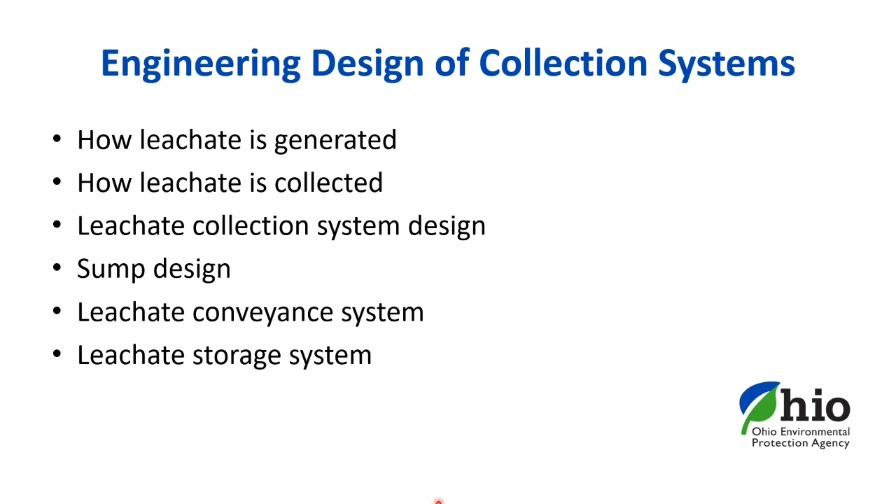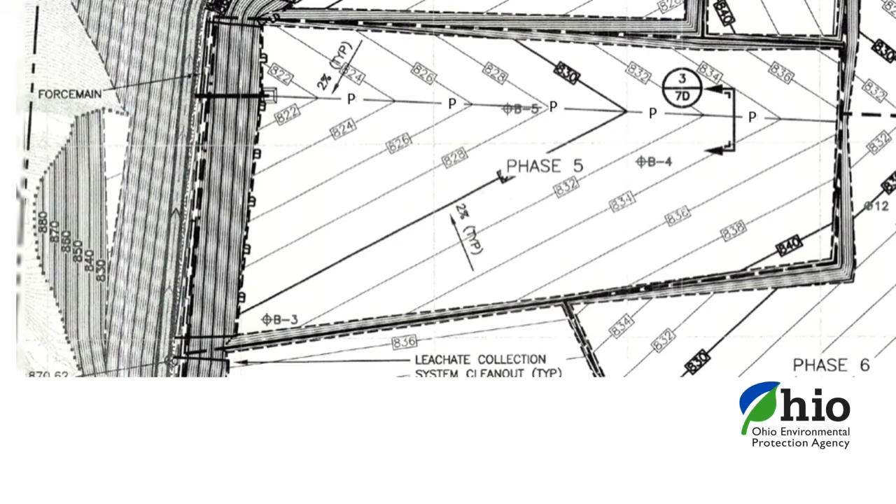If we look at this facility in cross section at the point in time where there's 10 feet of waste in the cell, we can examine one of the key design components to the leachate collection system, called head-on liner. If you think about head-on liner, it's basically the height that leachate fills up the landfill in comparison to the height of the drainage layer and the height of the waste.

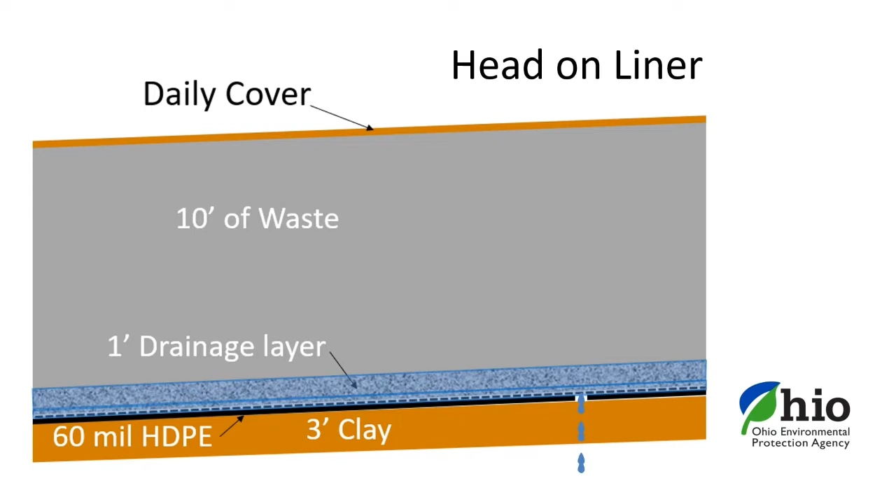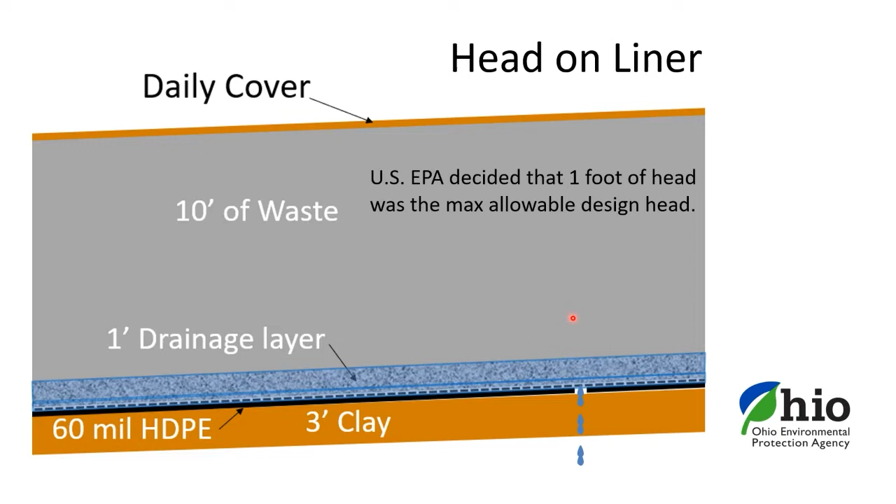In this example here, you can see there's a small hole in the HDPE liner, and there's a small amount of head on top of the liner system, and that hole would be leaking very slowly, much less than a gallon a minute. If there was an increased amount of head, more leachate would be leaking through that hole. As you can imagine, the higher the head gets, the higher the pressure gets, and the more leachate can flow through that hole. So in design, US EPA has limited the allowable head in a landfill to be 1 foot. That's one of the key things designers focus on when designing the facility.

The way they determine whether or not the facility maintains that less than a foot of head requirement is they use a computer program, the HELP model. It was developed by the Army Corps of Engineers for US EPA back in the early 90s, and it's been rewritten a few times since then. It's a fairly simple program, but it gets the job done.

When you're using that program, the main inputs you put in are the maximum flow length that the leachate flows, the landfill cross section you're designing under, and the permeability and slope of the drainage layer. Those are the key things you look at using the HELP model in designing the landfill's leachate collection system.

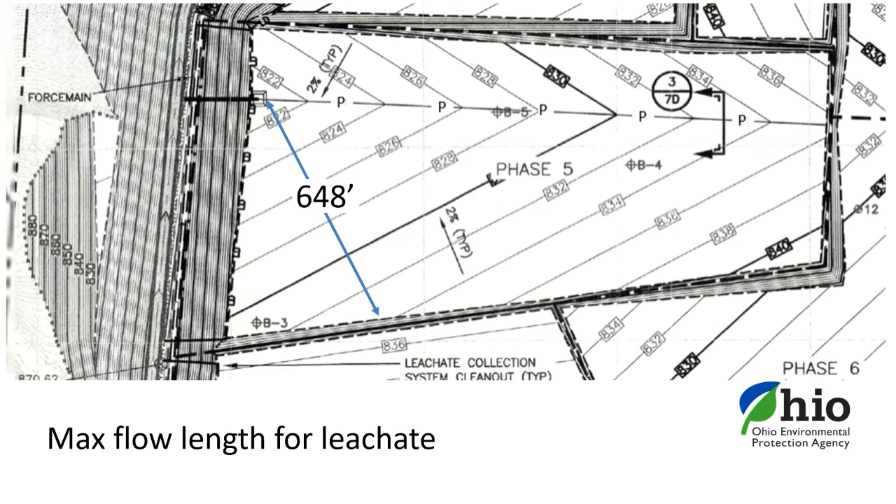So looking at this specific facility, the design scenario that Ohio EPA recommends when designers are trying to figure out what permeability to set their drainage layer at is a daily cover being placed in cross section, 10 feet of waste, and then the drainage layer and the liner components.

So in the situation where the designer is trying to determine whether sand is appropriate for that drainage layer, they'd feed all this information into the HELP model, and the HELP model would generate the calculated head on the liner system. With sand at 10 to the negative second centimeter per second permeability, which basically means a drop of leachate would flow at a velocity of 0.01 centimeters per second through that sand - fairly slow, but substantially faster than it would flow through the clay liner, which would be more like 10 to the negative seventh permeability.

If we did this calculation, the HELP model would tell us that it would end up with 12 feet of head on top of the liner system, which does not meet the design requirement, indicating to the designer that sand is not an appropriate drainage layer at this facility.

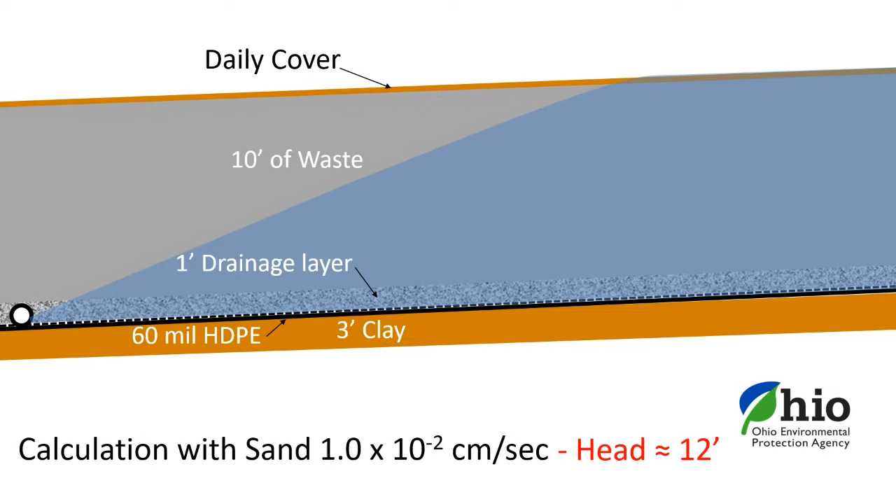If they did basically the same calculation but changed the permeability of the drainage layer to something more similar to gravel, with 1 centimeter per second permeability or greater, they would find the predicted head on the liner system would be about 11 inches, which would be acceptable design because it meets the 12 inches of head requirement. And that's exactly what this facility has in their design - a minimum permeability for their gravel drainage layer of 1 centimeter per second.

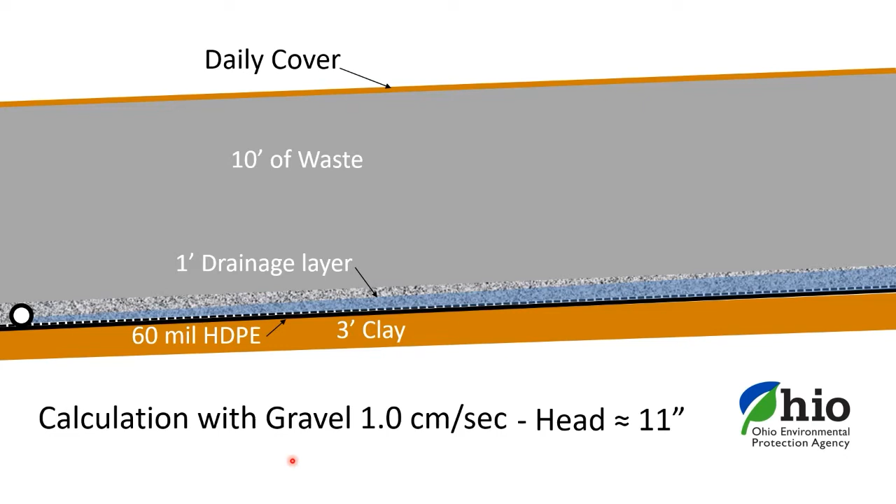So how do we get leachate out of a landfill? There are basically two different methods, and the landfill in my example actually has both. You can drain leachate by gravity out through the liner system to a lift station, then to a tank, and then it can either go to a sewer or be hauled by truck to a treatment plant. The other option is to pump the leachate out of the facility.

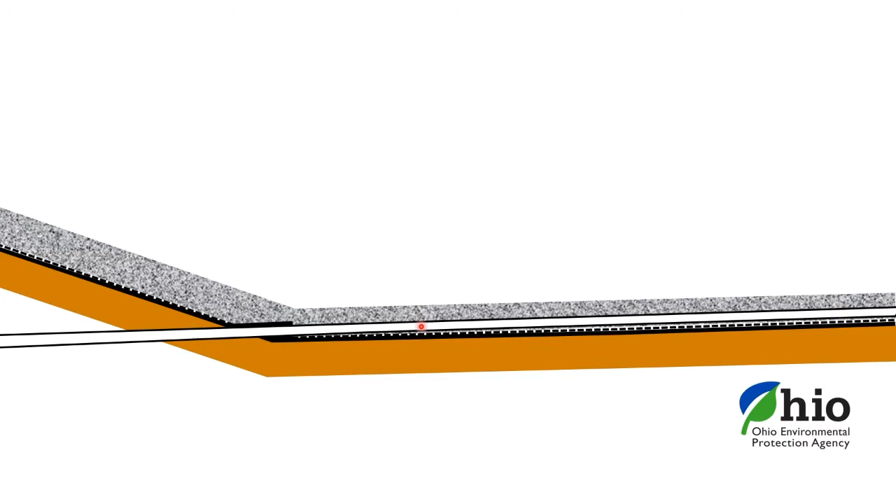If we look at a cross section where leachate is leaving the facility via gravity, this image represents the liner system and drainage layer of the landfill. Your waste would go in this area. We have the leachate collection pipe sloping down and penetrating the side of the landfill, going out to the lift station and eventually to the tank. At this penetration, there's a boot that keeps the leachate from leaking out of the facility.

From the lift station, leachate gets pumped up through a pipe and into the leachate collection tank. How these systems work is: leachate flows into the system, goes up, hits the middle pump-on float, and that turns on the pump, and the leachate is pumped out into the tank.

If this system isn't working correctly and the pump is broke, leachate flows in from the landfill, floats the upper high level alarm, and sets off the alarm, indicating to the operator that they need to come out and fix the pump in the lift station.

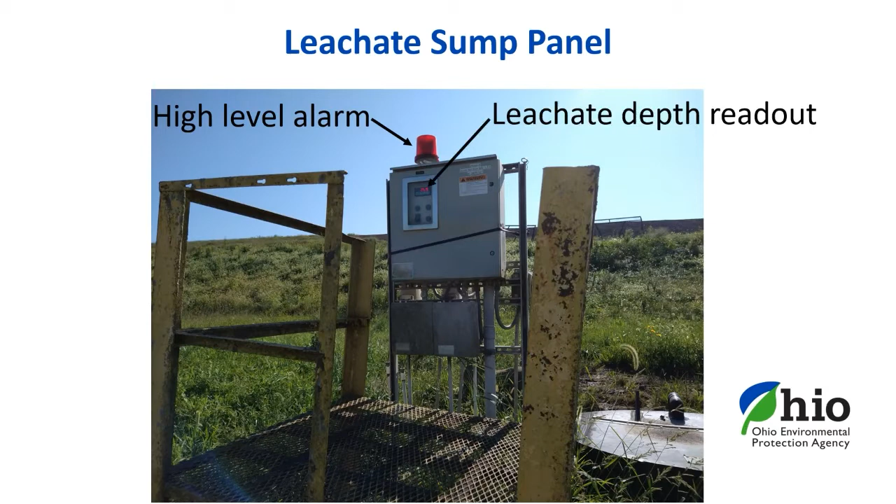If we follow the plumbing and wiring up the riser pipe, we end up at the lift station, the leachate sump panel. Here in the background, we can see where the riser pipe comes in and is plumbed in. On this leachate sump panel, we can see the high level alarm and the leachate depth readout.

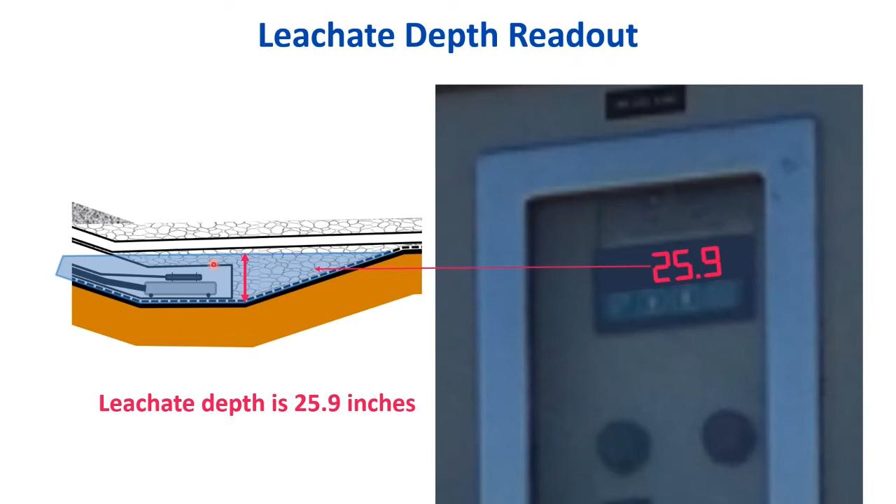If we zoom in a bit, we can see the current depth in the sump is about 26 inches. That means in the sump itself there is about 26 inches of leachate. And at this facility, the pump is just about ready to turn on and pump leachate out.

If we look back to our cross section, the basic way the system works is: leachate flows into the sump, gradually fills the sump, and eventually the pump turns on and pumps the leachate out. This happens multiple times a day, every day, and the system works just fine.

And obviously, on occasion, the pumps do break down, and when that happens, the leachate begins to build up on top of the sump, and eventually the high level alarm would go off on the sump. Our regulations state that the high level alarm needs to go off no more than one foot above the top of the sump. Often operators have it set at a lower elevation so they can come in and fix the pump sooner. The top of the sump is considered basically this grade break right here.

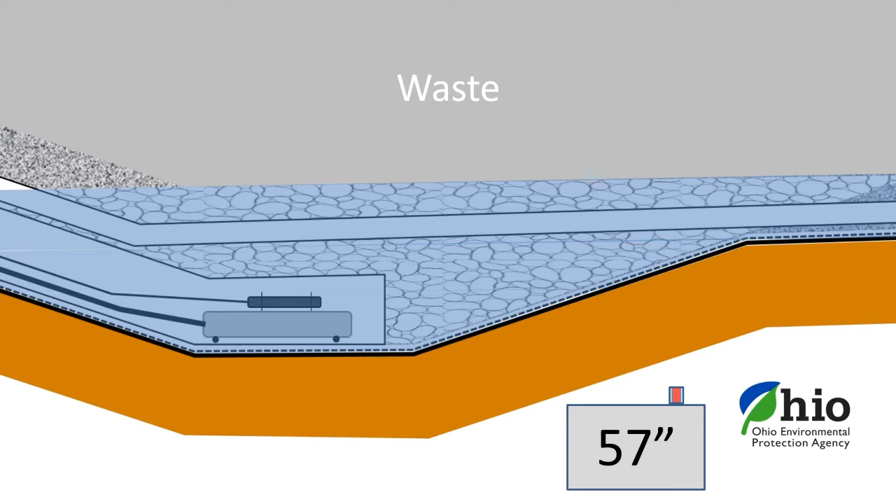So this would be your normal landfill cell, this would be the sump, and then this would be the top of the sump itself. Now looking at the leachate conveyance system: we go from the pump to the riser, out from the riser to the force main, and then all the way down to the leachate collection tanks.

Another common tank design is a double-walled tank, both above ground and underground double-walled tank. Both of these tanks are a tank within a tank. So there's a tank that holds leachate, and then there's a tank that holds an air gap and the inside tank.

So the way they're supposed to work is there's always air between the two tanks, and there's a witness zone where you can either look through it or there's a pressure transducer inside that space between the two tanks, so we can find out if there's leachate between the two tanks, which there's never supposed to be. It's always supposed to be dry. But if there's a hole in the inside tank, we'd find leachate between the two tanks.

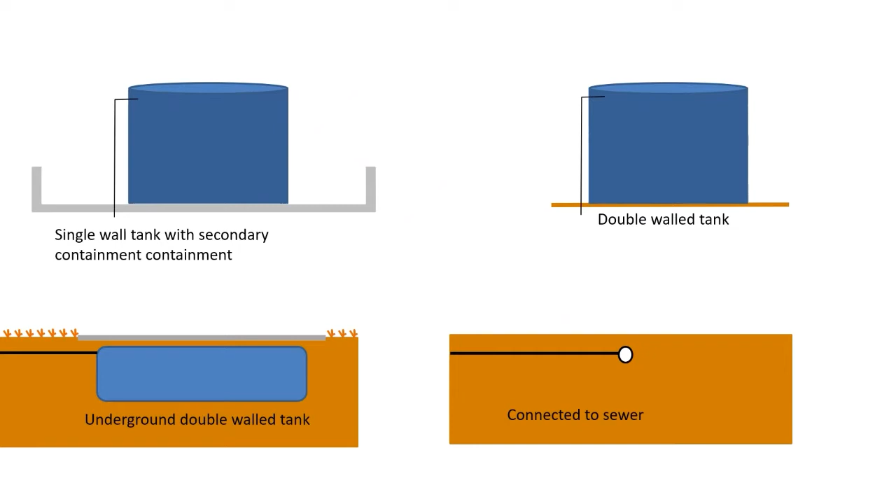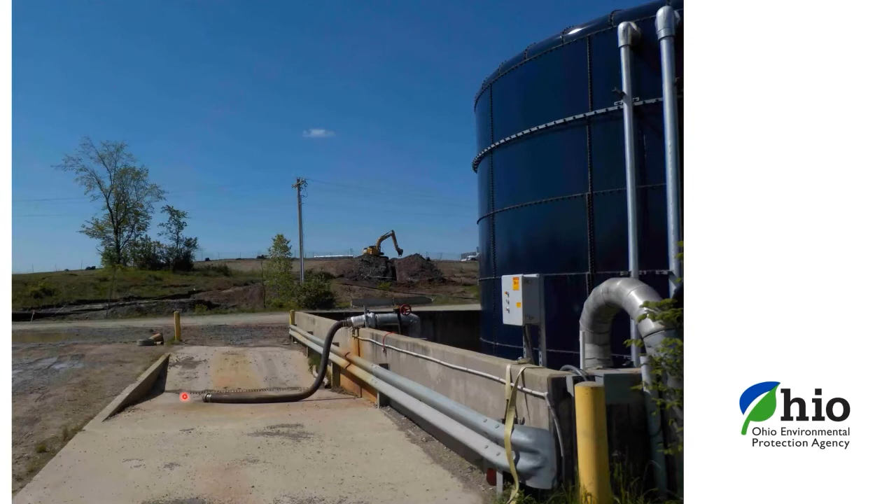So here's an image of a tank at an actual landfill. We can see the secondary containment wall here. In the background, we can see that the tank is at about 11 feet of leachate within the tank. Here's where they can load a truck from. And if we look at a different angle, we can see the truck can park in this area. Usually there's a sump within these truck pads, so if something spills out when they're transferring leachate from the tank to the truck, it can be caught and then pumped back into the tank.

So in conclusion, landfills are designed to drain leachate to a sump or out to the facility's leachate collection tank. They're required to have a design of no more than 1 foot of head on the liner. Pumps remove leachate from the sumps. All these facilities should have high-level alarms that notify them when there is excess head on top of the sump itself. And leachate is sent from a tank, either being hauled off or directly to the sewer where it can go to a treatment plant.

So Leanne, I can turn it back over to you to see if there are any questions out there now.

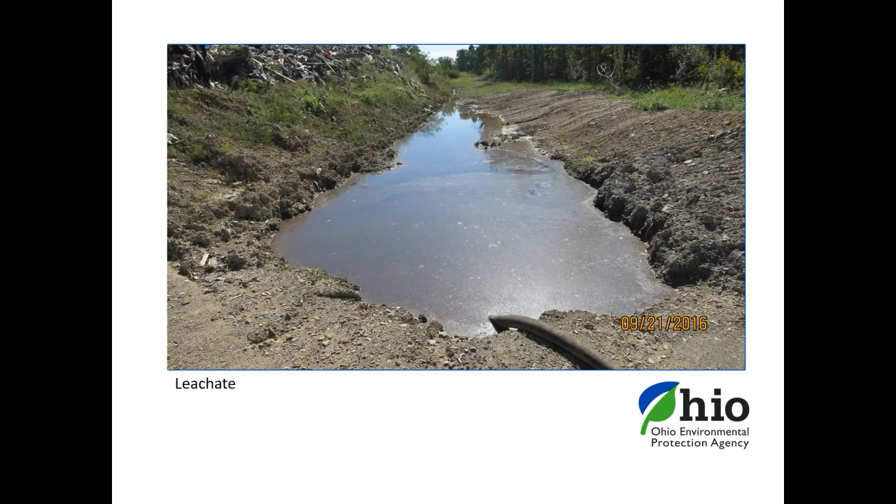This is a leachate outbreak that was excavated on the slope of the landfill, a very large outbreak. Here you can actually see the bubbles of landfill gas coming up through this opening in the side of the landfill. Here's another look at leachate.

Doing your homework is very important to conducting a thorough inspection of the leachate management system. While components of leachate management systems are often similar, each landfill is designed in a unique way. Knowing the number of sumps, the compliance points for a foot of head off the liner, and the types of tank and conveyance systems used at the landfill prior to your inspection is really helpful information. If you're a new inspector or new to a particular facility, it's a good idea to chat with your Ohio EPA inspector and/or the engineer. It can also be helpful to look through the permits to install, plan sheets, and any construction certifications. Feel free to reach out to us at the agency if you have questions. These are all good things to do so you know what to expect when you're on site at the landfill.

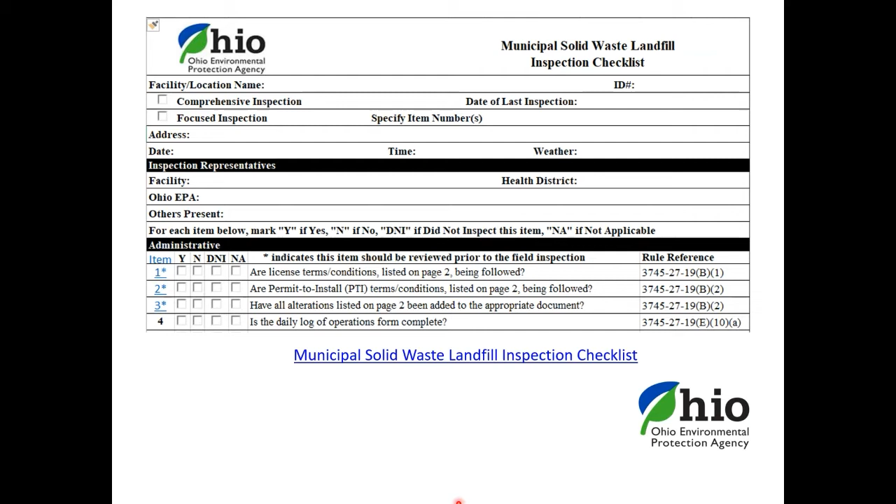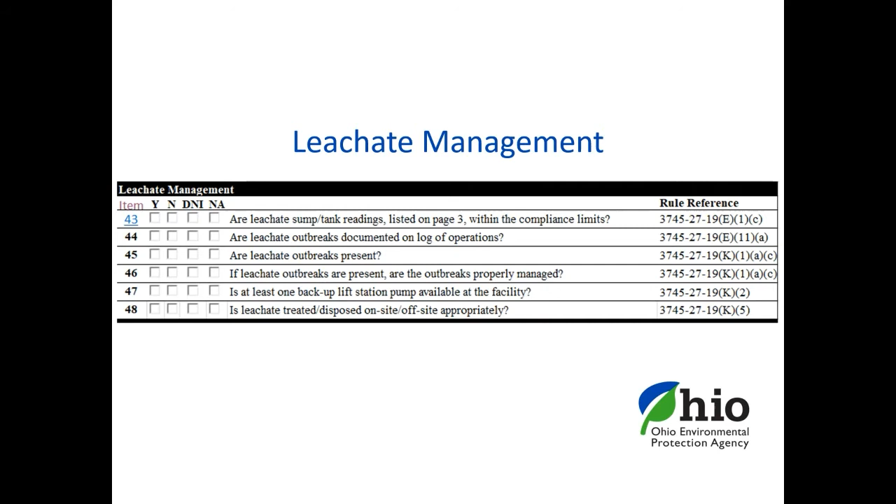As I mentioned before, leachate management is a significant part of a comprehensive inspection. This is the primary section from page 2 of the inspection checklist, and this is what we'll reference throughout the presentation. You'll notice there are rule references on the right, covering 2719 E1, which is construction, E11, which is inspection, and K, which is leachate management.

So 2719 E1C requires the owner operator to maintain the integrity of engineered components at the landfill and to make any necessary repairs. A failure in and of itself is not necessarily a violation of this rule, but rather the failure to identify and properly repair the engineered component in a timely manner may be a violation. When we talk about engineered components, particularly regarding the leachate management system, these include those components described in the sanitary landfill construction rule, which is 2708. Notably, the rule requires that repairs must restore the system to the original design.

As we move through the presentation, I'm going to show you some instances where things weren't repaired to the original design as required. 2708 may not be a rule that inspectors reference every single day, but I encourage you to refresh your memory and take a look at the sections noted on this slide to ensure that you're hitting all the engineered components that are observable during an inspection.

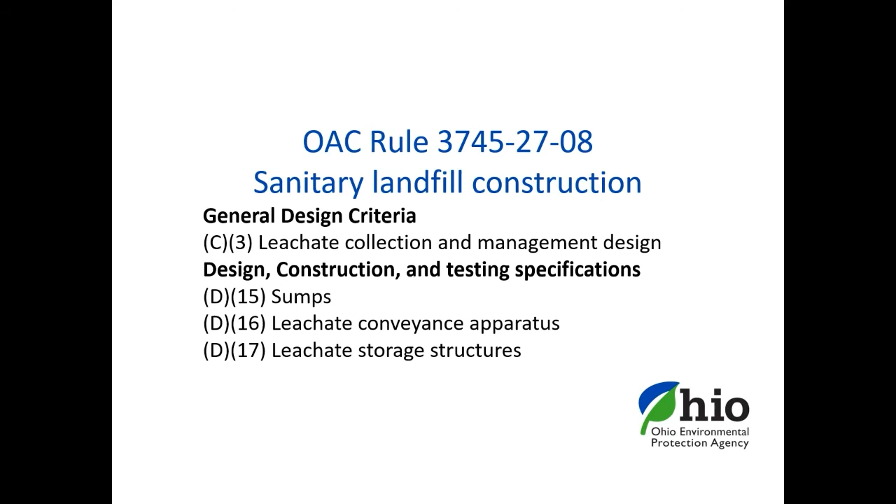So let's talk about some of these components. Here's a list of common engineering components that you may observe at the facility, and I think Brian talked about pretty much all of these. We'll go through them, and I'm going to show you some pictures of some really good setups and some setups that had issues.

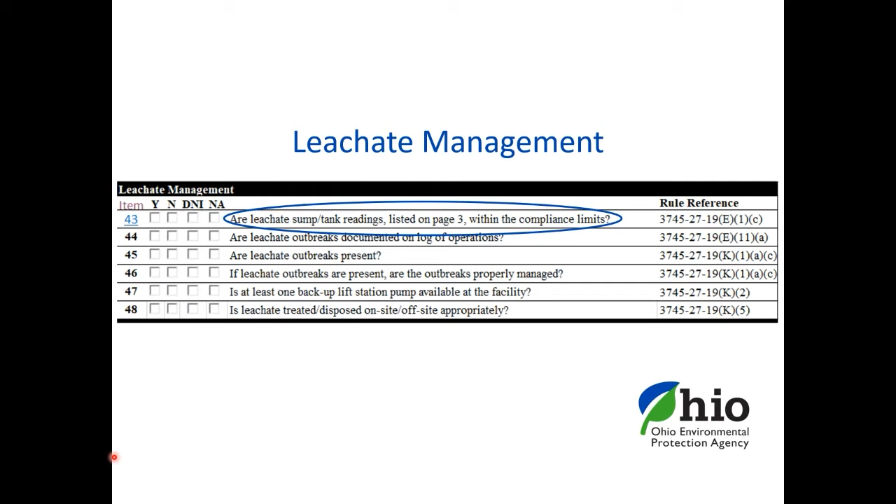You can see in the circled area here that item 43 on the leachate management portion of the inspection checklist, this E1C reference, specifically asks about leachate sump and tank readings and whether they're within compliance limits. As we go through this presentation, there are a number of other engineered components associated with the leachate management system. If there are any issues with those structures, you can use the check in the following section under ancillary structures and engineered components, which is item 49. So if you note any issues with tanks, pumps, secondary containment structures, or leachate conveyance structures, if any of those things are not functioning properly, you should make a note of their condition on page 4 of the inspection checklist in the item and information section.

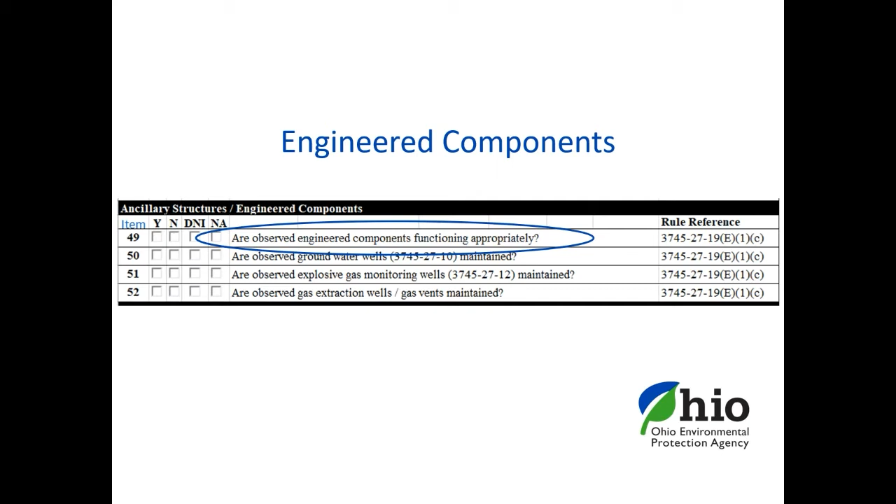This is where we move into a little more sophisticated systems. I find as landfills construct new cells, their technology tends to get a little more sophisticated each time. So this is a panel at a landfill sump, and the panels will often have the following components. I'm going to zoom in here so you can see those a little better.

So they'll have a digital readout for the depth of the leachate in the sump. This happens to be a sump with 2 pumps, so there's actually 2 readouts. There should be a switch for the leachate pump with an automatic and on and off setting.

And you can see that here. Sometimes instead of on, it'll say hand. That just means that you've turned it on by hand and it's continuously pumping. But the pump should be in the automatic setting at all times. There's usually an indicator light somewhere that the pump's on. So here on this panel, you can see these lights are where you would note if the pump was running at the time of the inspection.

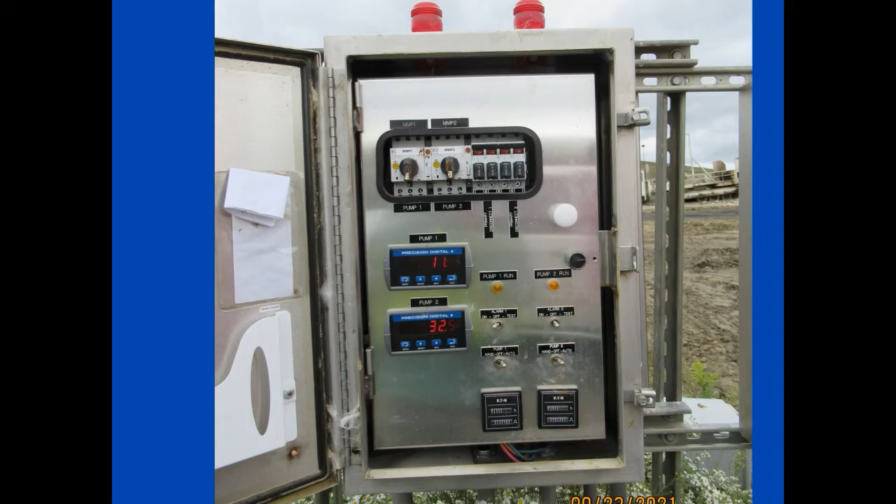And then they're also required to have a high level alarm. Those are up here, these lights that would turn on should the sump reach a level that's above 1 foot of head on the liner. So this is where you're going to determine as an inspector how much leachate is in the sump at any given time. By knowing how much leachate's in the sump, you can determine how much head of leachate is on the liner at any given time.

Brian kind of went through this, but I really want to read the rule for you to further clarify. OAC Rule 3745-27-08, which we'll remember is the construction rule C3I, states that the leachate collection and management system shall be designed to limit the level of leachate in areas other than the sumps to a maximum of 1 foot throughout the operation and post-closure of the facility. For the purposes of the rule, a sump is an excavated depression of limited size that serves as a collection and transfer point for leachate. Therefore, a foot of head on the liner is the compliance point in this case.

Brian's talked quite a bit about this, so I just want to talk a little bit about how that's calculated and determined. Let's say at this particular facility, at this panel, the sump is 24 inches deep. So a foot of head on the liner would be 36 inches of leachate at the sump. You know this because you did your research before the inspection—you know how deep the sump is. You may have confirmed it also with the facility representative when you're having a conversation during the inspection.

So most facilities will have a high level alarm that's triggered at 36 inches, if that in fact is 1 foot of head at the liner. Brian also mentioned that some facilities will have their alarms go off maybe a little bit lower than that, just so they don't ever go above 1 foot of head. For instance, at this facility, their high level alarm actually is triggered at 30 inches, so 6 inches below that compliance point.

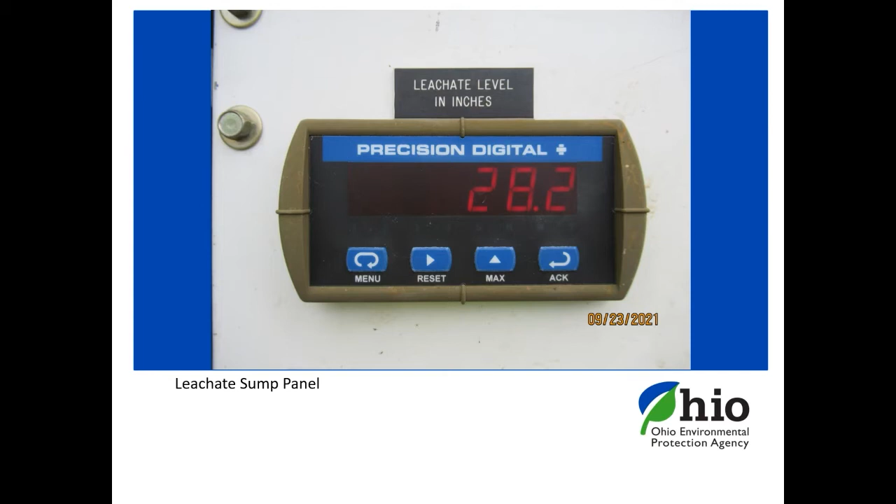Just a word to the wise for inspectors, these digital readouts actually flash very quickly. So if you're trying to take a photo, sometimes you'll notice that it'll be blank in the photo, or not all the numbers will actually get captured. So you might have to take a couple pictures. I recommend...

Utilizing the leachate sumps reading section on page 3 of the inspection checklist. This gives you a space to actually take notes. You can list the sumps, note if they were in compliance, record the reading at the time of the inspection, and there's also a checkbox to ensure that it was in automatic mode. If you have a large landfill that has more than 6 sumps, we can kind of tweak these inspection checklists, so you can just reach out to your inspector from Ohio EPA and they can help you do that.

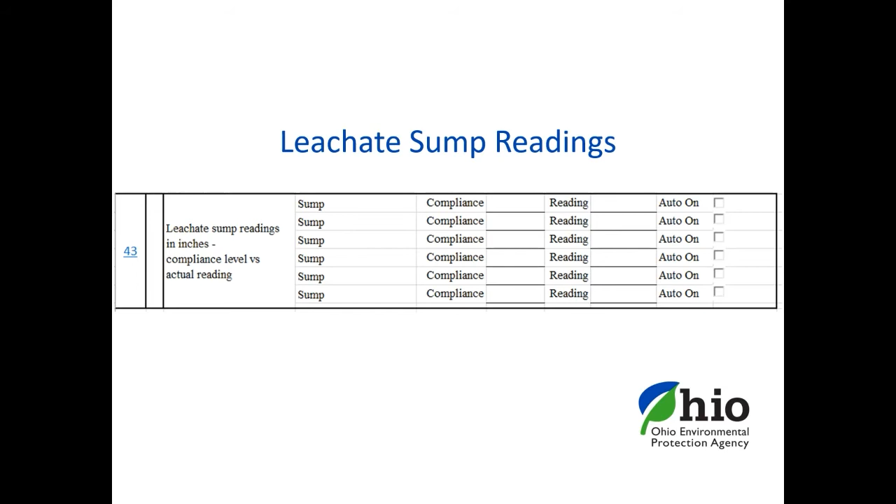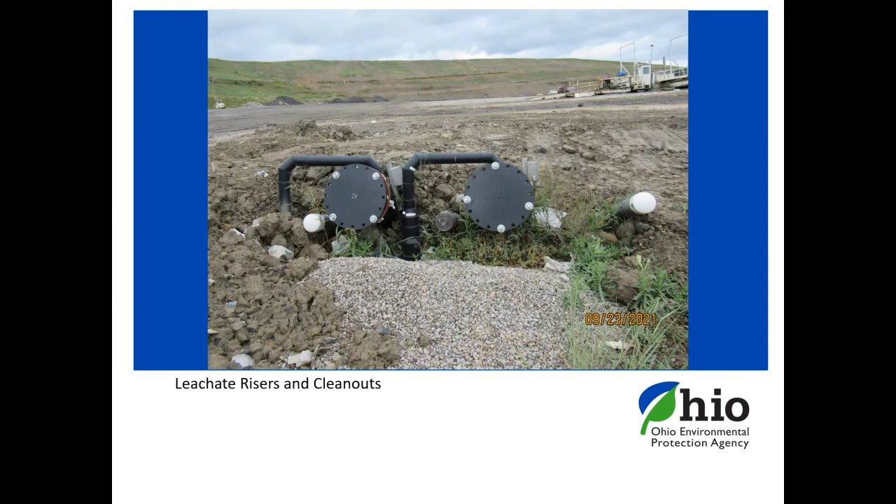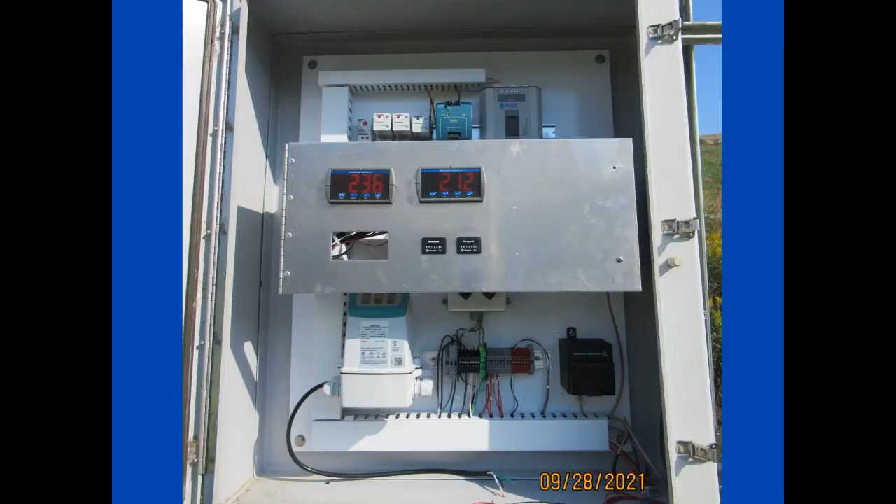So here's a really fancy sump panel. This is a pretty new panel at a landfill. And what you can see in here that's a little different than what we've seen in the previous electronic panels is all of the wiring here and here. This panel has telemetry. And telemetry is just the process of recording and transmitting the readings of an instrument to another system, typically a computer system, sometimes a call system.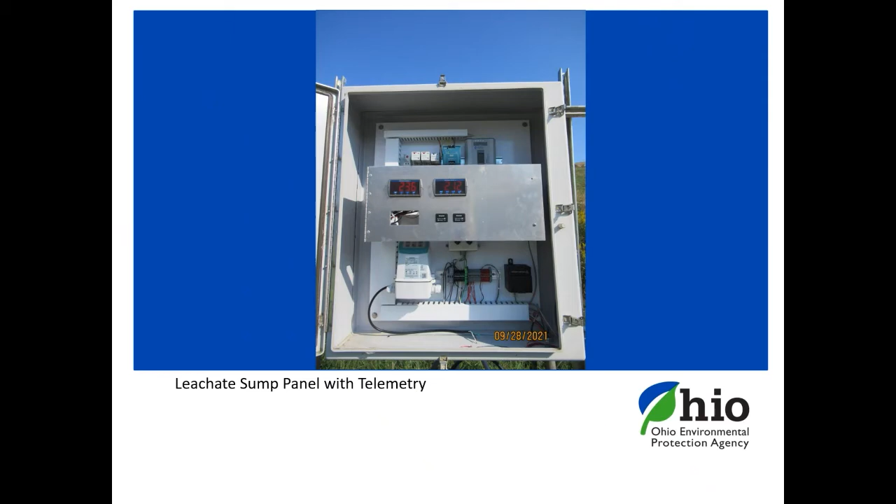Brian sort of mentioned that about dealing with high-level alarms on the weekends. In this case, this is a very sophisticated system that you don't see frequently because it is pretty expensive, but it's kind of a top of the line system.

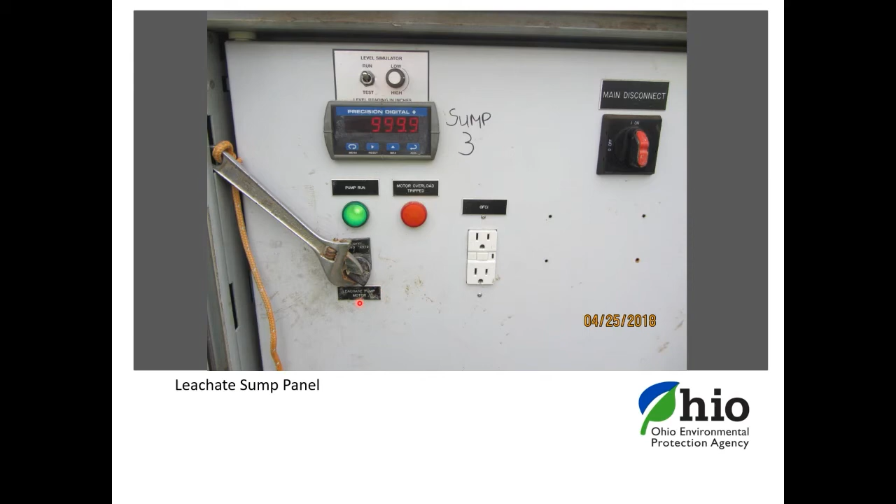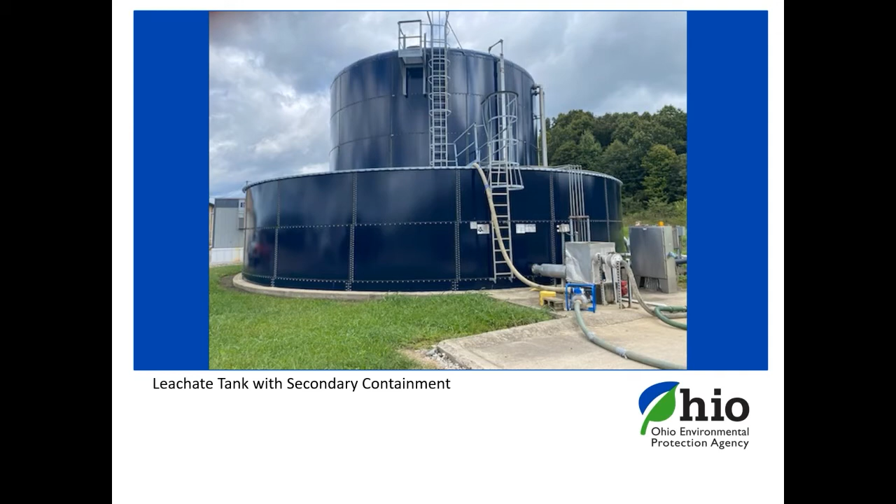So here's just a simple system with the concrete secondary containment. Here's another example - I kind of like this one because I think this leachate tank, when you look at it from the outside, looks like a two-tiered cake. It seems like, oh, that's a really interesting kind of tank. But when you look inside, you note that bottom layer of the cake is actually the secondary containment for the leachate tank.

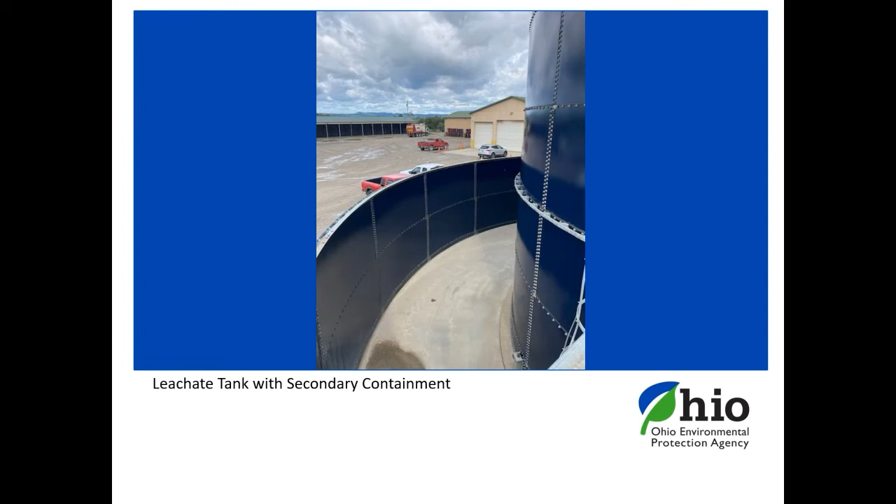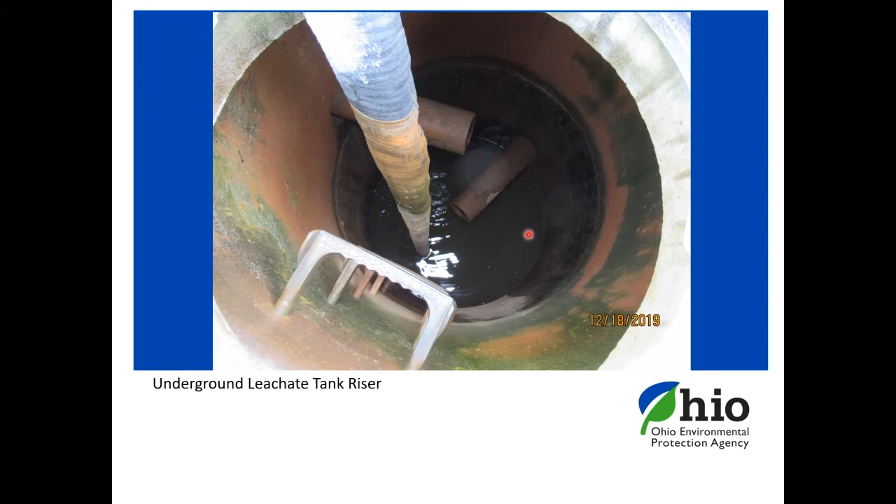And on the next picture, you can kind of see this is the riser itself. Once you open the manhole and look down in, this is the pipe that is the outflow from the leachate tank itself. And this is the outflow from the secondary containment of the leachate loadout system. So that's kind of a different look at one of those underground tanks.

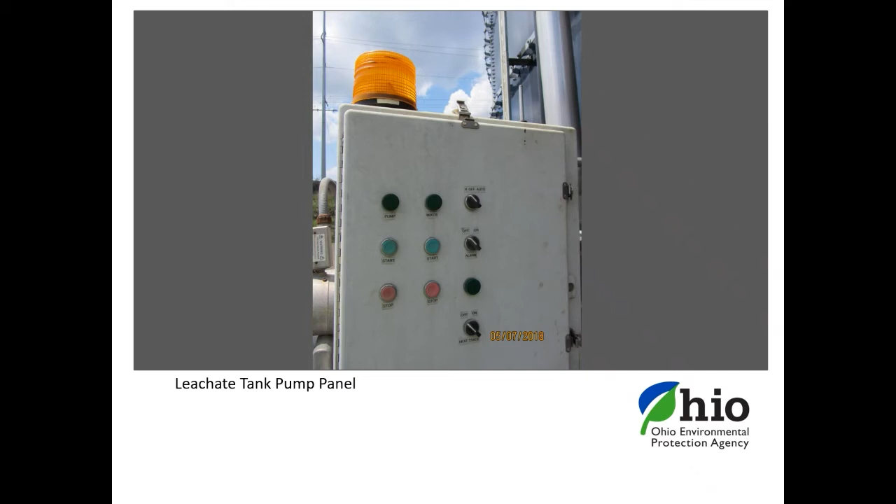And so here's a leachate tank pump panel at that same system where there are so many problems. You'll note here that the alarm is off and that the pump is on hand again. So this system is not set up, and this system is not being operated in compliance at the time of that inspection.

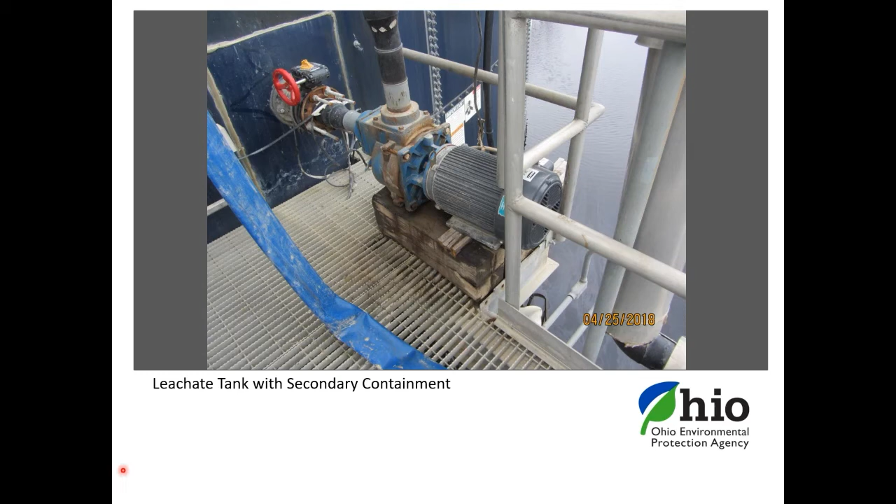Same system with all the problems. This pump here was the pump that conveyed leachate from the tank into the loadout for the system. So this pump was not operational, so they had actually just placed this blue hose that you see in the foreground up into the tank, and were pumping straight from the tank through this hose down to the secondary containment, which obviously was not how the system was designed and is not protective in the same way the system was designed. So there were compliance issues here.

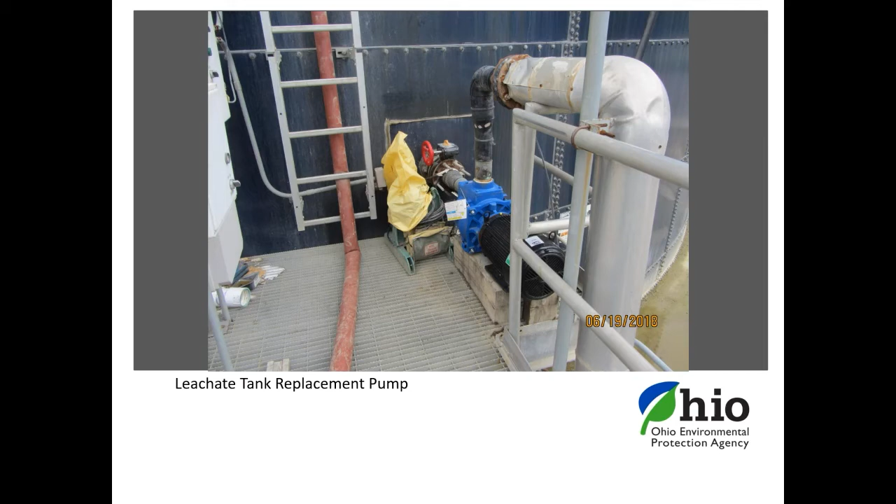So here's a secondary containment sump pump. This is the pump that had malfunctioned in the previous photos where leachate was pooling. But in all of these concrete secondary containments, there is going to be some sort of sump typically that just pumps any leachate and often any stormwater that gets into the secondary containment. If you have a heavy rain event, once it goes into that secondary containment, typically it's just pumped back into the leachate tank and disposed.

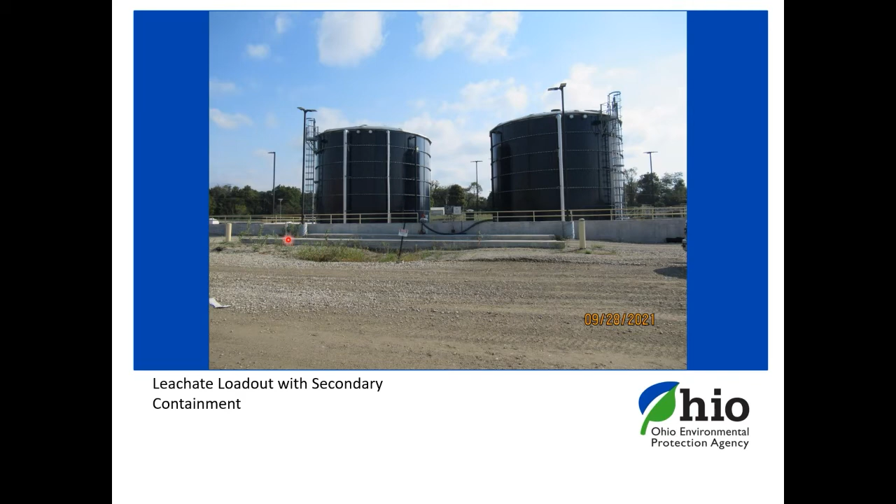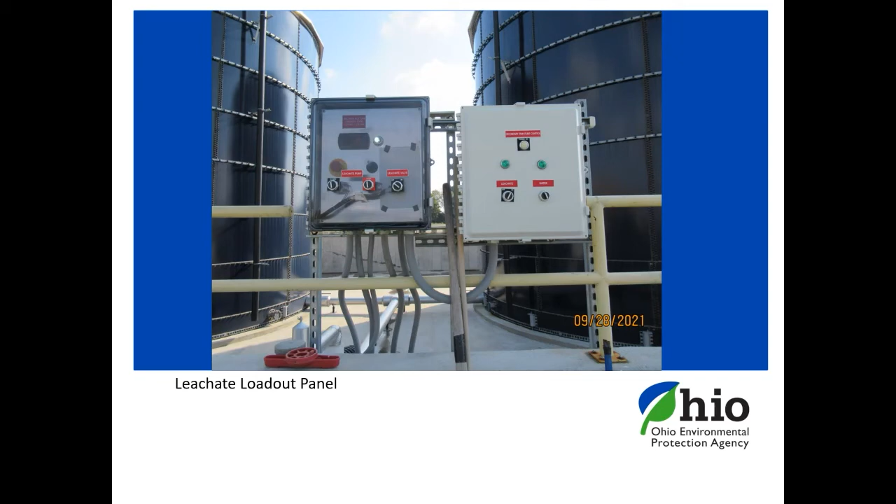This is another panel system for a leachate loadout, so this is a pretty sophisticated system. This is also a relatively very new system.

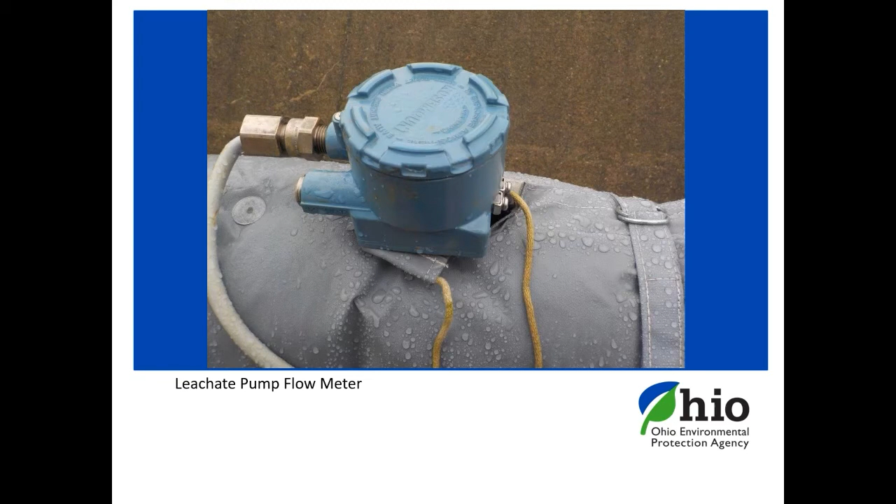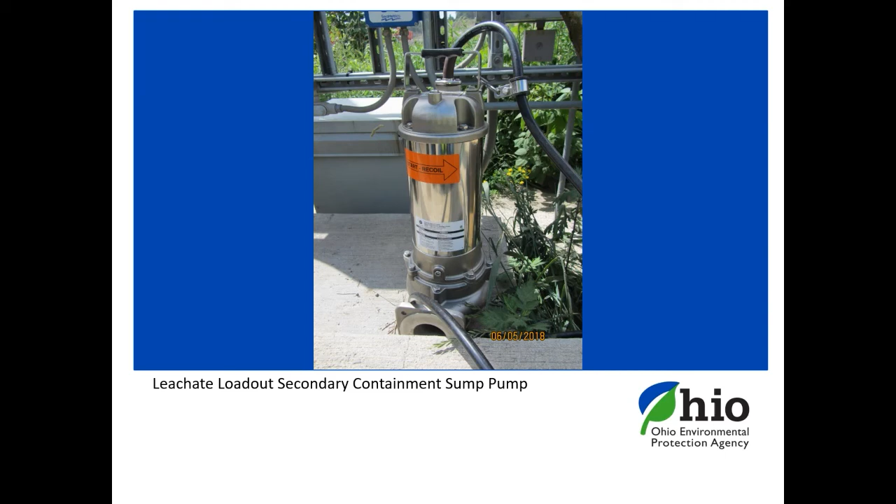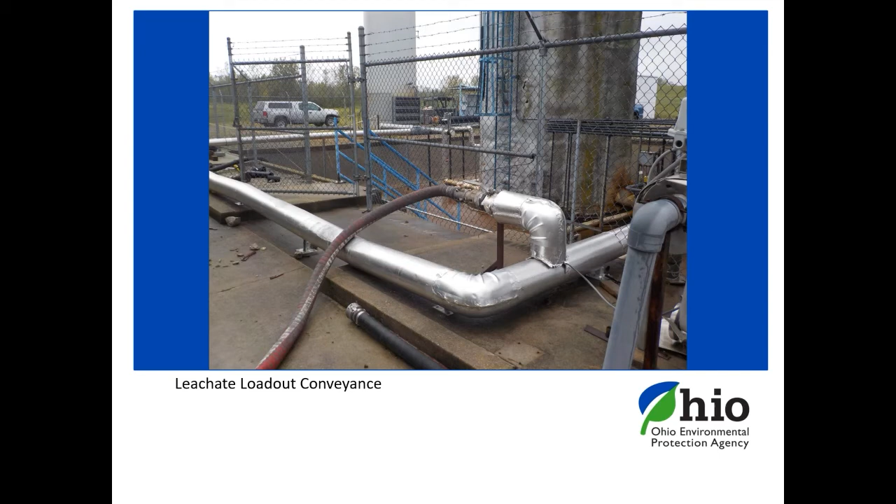Here's another example of loadout conveyance. I show you all these pictures just to show how different every single system is. So if you're an inspector who only gets to inspect one landfill, you kind of have an idea of what your system looks like, but there are all kinds of variations on how these systems are designed and constructed.

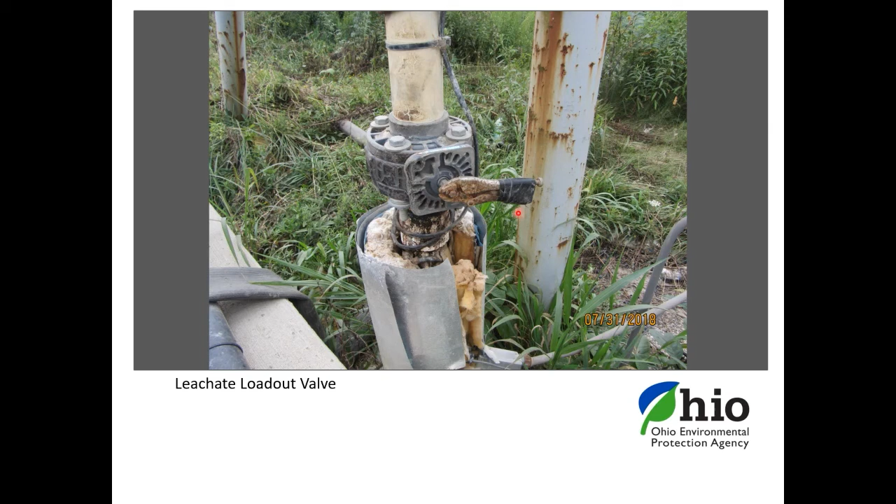So here's just one other little thing. If you see this, once again, we've got a pair of pliers here. Anytime you see electrical tape or duct tape, it may be indicative that there's been some sort of repair that doesn't meet the design standards. So this was a failure of an engineered component here, and here it is restored to as designed.

And these red levers you'll often see as part of the leachate conveyance systems. So that kind of takes us through some of the different engineered components.

So let's talk about E11A. This rule requires owners and operators to inspect daily for a number of things, and one of those things is leachate outbreaks. Each day, leachate outbreaks, if they exist on the landfill cap, need to be identified and work needs to take place to remedy the outbreak. That work should be noted in the daily log of operations on Form 3.

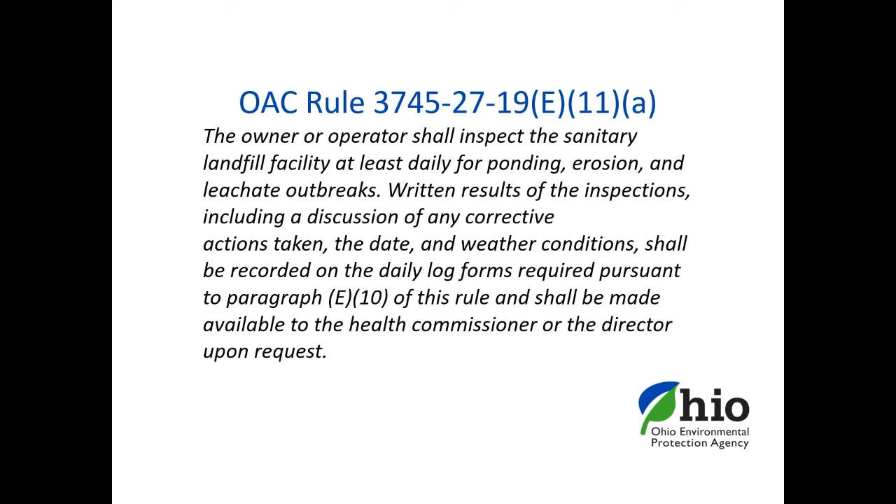So leachate outbreaks and any corrective actions should be noted in the corrective actions taken and other comment section, as well as any failure of any engineering components. Unfortunately, this section as it stands in this current form is impossibly small, so it doesn't speak to how important this section really is.

And I think because it's small, it's often underutilized by operators. When I talk about the Form 3, I like to explain to facility owners and operators that this particular section is super important, and it's their opportunity to show me as the inspector what's going on at the facility and what they've done to address it on any given day. Because a failure or a leachate outbreak isn't a violation in and of itself—it's failure to address those outbreaks that's the violation.

So here is the owner operator's place to show how they've addressed those things. And because it's only one line, I often encourage operators to add an additional page or use the back to give yourself more space to talk about what you've done on any given day. Because there are a lot of other things that can be noted in this section as well, outside of just leachate outbreaks and engineering components. So sometimes we have to get a little creative with space and the technical assistance we give to operators in completing this form.

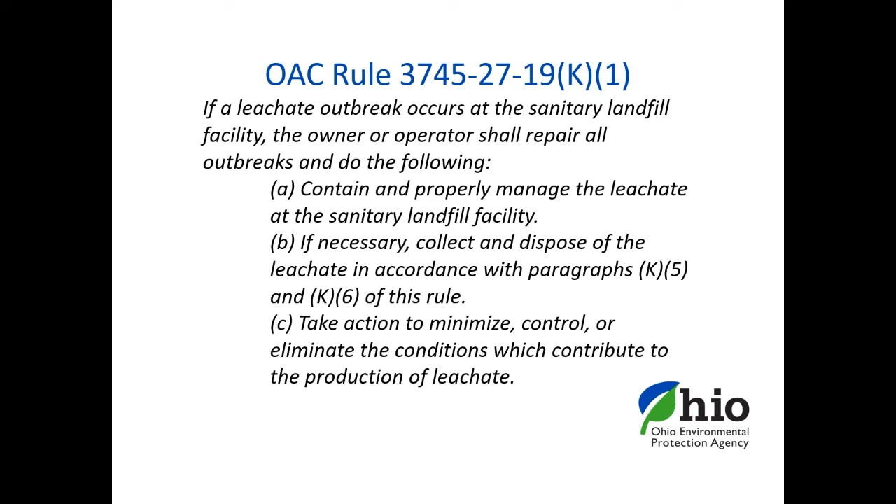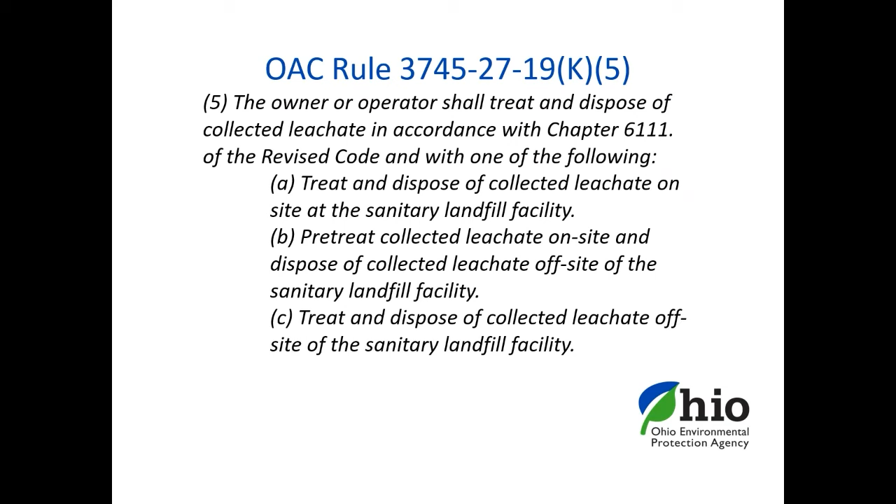So that's pretty much it for me as far as my presentation. I'll let Leanne take back over and maybe answer some questions.

Okay, we do have a few questions that have come in. The first question is, do you ever conduct an inspection where everything is functioning well with the leachate management system?

Yeah, so that's always my hope and dream is I go out on an inspection and there's no violations. And certainly, sure, there are times when you go out and do an inspection and everything's working great. I just accompanied the health department yesterday on an inspection, and their leachate management system was really functional and they didn't have any issues. So yes, you absolutely can.

I think sometimes as a new inspector, or maybe if you're new to a facility, you might feel like you have to find something wrong, but certainly there are lots of facilities that operate that are doing everything that they should. And as I said before, even if they have leachate outbreaks, or even if something's broken that day, as long as they're addressing those situations, they're still in compliance.

Okay, we have another one. How do you know if the facility is properly managing leachate outbreaks?

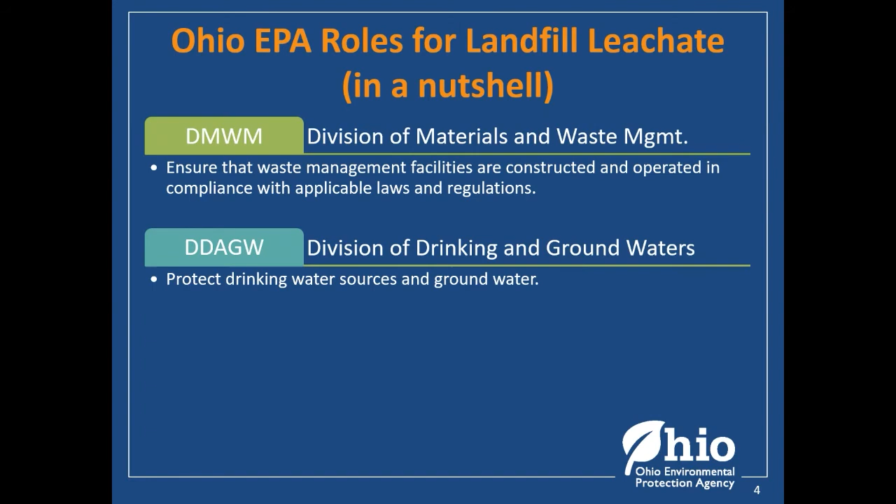Most of you are probably more involved with DMWM than with DSW, so I'm going to do a quick summary of some of the division's focus areas and how they differ. First, we have DMWM, which focuses on how landfills are constructed, operated, and managed. Second, we have DDAGW, which focuses on protecting sources of drinking water and groundwater. And third is my division, DSW.

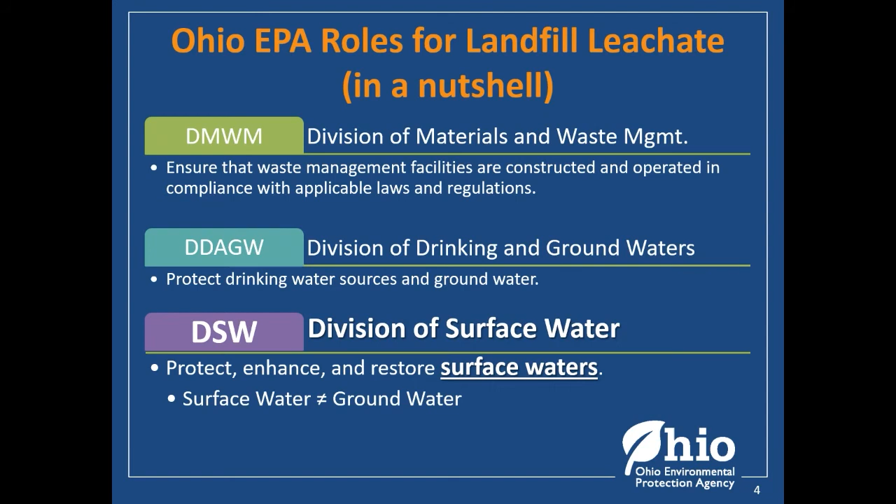In relation to landfill leachate, DSW strives to protect surface waters. Although DDAGW and DSW both focus on water, surface water and groundwater are different. This slide accentuates the difference between DDAGW and DSW, where groundwater is below the Earth's surface. Surface water is located above the Earth's surface and includes rivers, lakes, and wetlands.

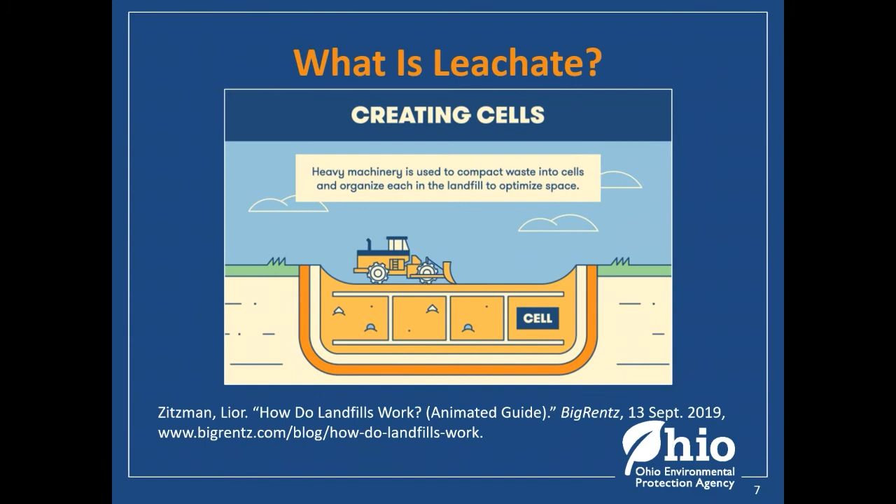What is leachate? Leachate is defined as liquid that has come in contact with or been released from solid waste. So let's back up a bit here. Just to recap, solid waste comes in and is essentially buried into these compartments called cells. These cells aren't just some hole in the ground. They include a barrier designed to hold in any waste, solid or liquid, from contaminating the groundwater below.

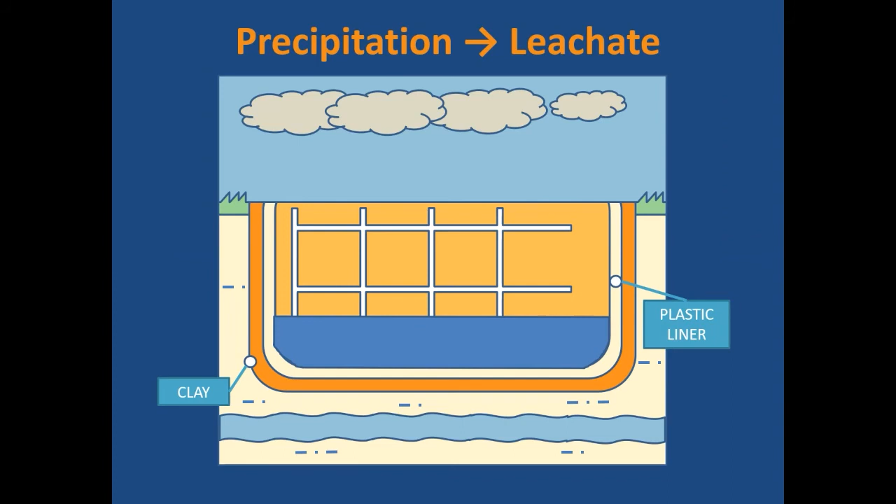One of the common ways that leachate can be generated is through precipitation events. Rainwater seeping into the cell becomes contaminated. If the clay and plastic liners are doing their jobs, the liquid will accumulate within the cell. Besides precipitation, there are many other factors that impact leachate production. Another common one includes the chemical and biological reactions that can occur within the solid waste itself.

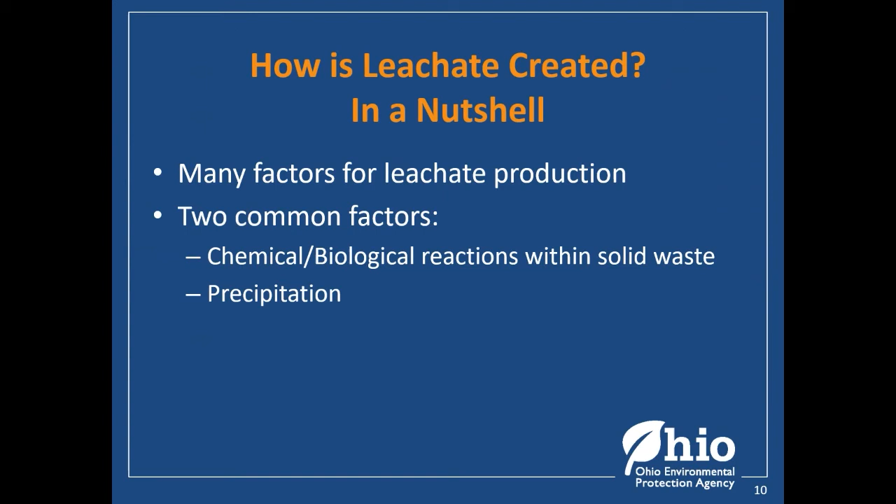The accumulated leachate is pumped out of the cell and typically undergoes treatment before it is discharged into a water body. But why does it have to be treated? And how and where is it treated?

So why treat leachate? Let's take a look at what's even in landfill leachate. For one thing, it is high in organic and inorganic pollutants. Another is that the pollutant levels are highly variable and depend not just on the waste characteristics, but also environmental factors such as climate.

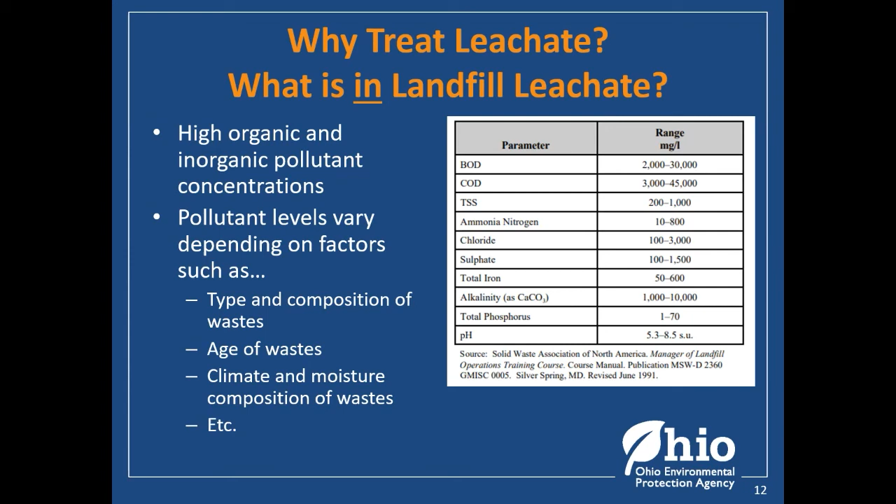Okay, so we've established that the leachate definitely has to be treated before it goes to any stream, river, or lake. After collecting the leachate, who treats it? The three most common options include treating it on site, meaning that the landfill has an effective treatment system on the property. Due to unavailability of space or funds, many landfills may rely on other options.

These options include off-site treatment, which means that the landfill sends the leachate elsewhere for treatment. Once that other facility receives the leachate, it is out of the landfill's hands. The third option is a combination of on-site and off-site handling, where the landfill could have a system that partially treats the wastewater before sending it elsewhere to complete the treatment requirements. For this presentation, we'll be focusing on the off-site handling and the mix of both.

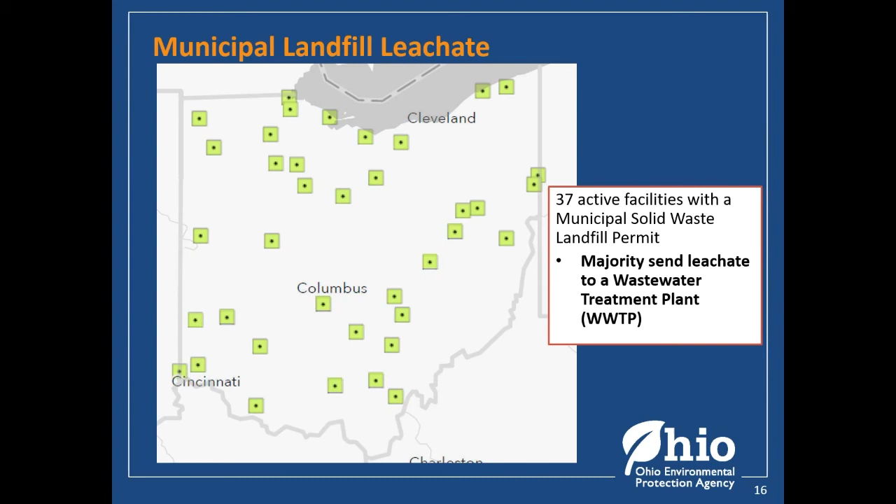So what is a wastewater treatment plant? It's a facility capable of treating wastewater down to levels appropriate for discharging to surface waters, such as rivers, lakes, streams, etc. Note that most of the wastewater treatment plants accepting leachate are designed to mainly treat domestic wastewater.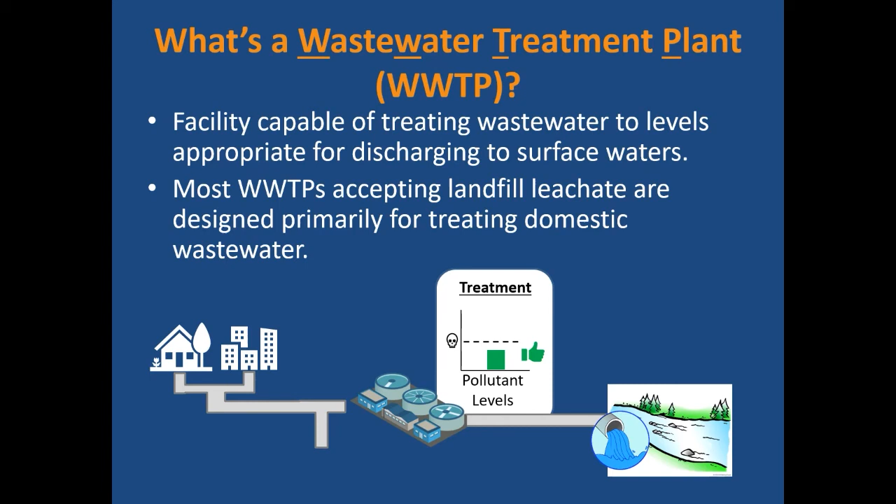So how does leachate even get to a wastewater treatment plant? Leachate can be transported to a wastewater treatment plant through a direct connection or by hauling it to the wastewater treatment plant.

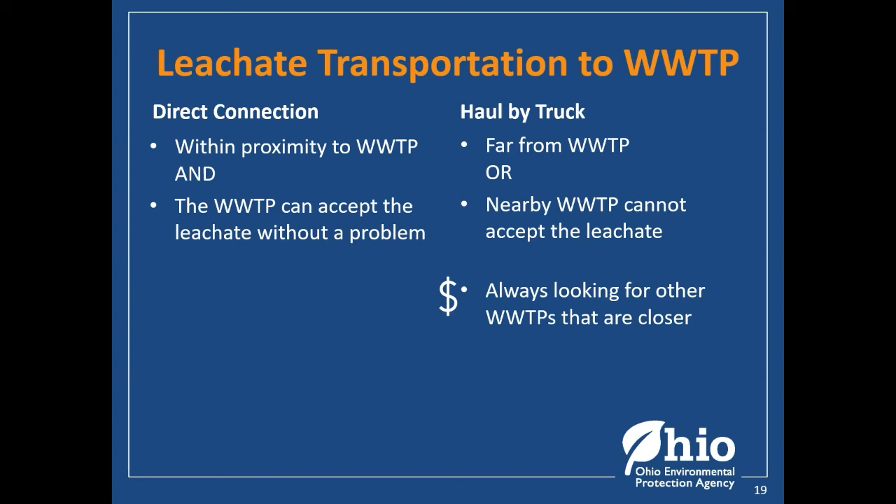Now, you might be wondering why any landfill would want to haul its leachate instead of use a direct connection. A landfill would have to haul leachate if it's physically far from the destination or if the nearby wastewater treatment plant cannot accept the leachate. A landfill hauling by truck is always on the lookout for other wastewater treatment plants that are closer. But whatever happens, the landfill should have a second option for leachate disposal at all times. If the wastewater treatment plant turns them away, they need a backup plan.

But why would a wastewater treatment plant reject leachate? Let's explain how the leachate could impact a wastewater treatment plant. Remember how I said that the wastewater treatment plants are mainly designed to handle domestic wastewater? Here's that side-by-side comparison of leachate and domestic wastewater again. If a facility typically experiences domestic wastewater, it's easy to see how leachate can overwhelm the treatment system if given in high enough volumes.

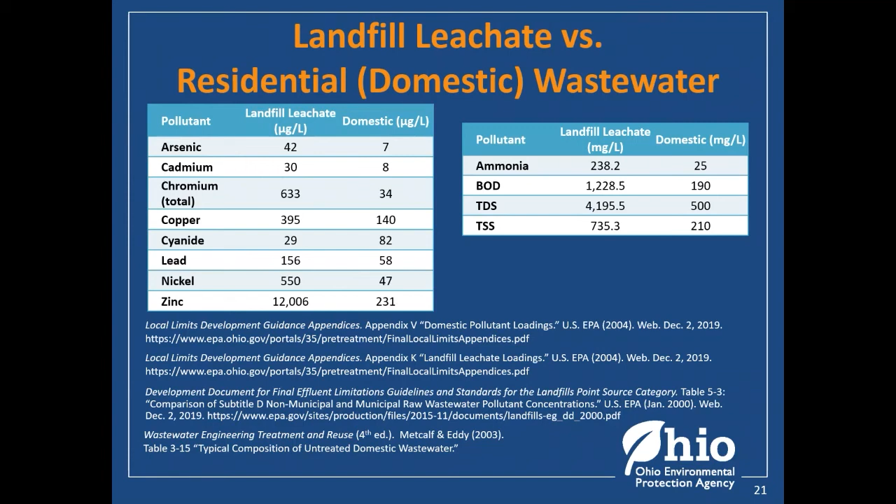In a previous slide, we went over an example of how domestic wastewater is treated at the wastewater treatment plant. Now we'll try the same scenario with leachate. Again, domestic wastewater enters the wastewater treatment plant and takes up some of the plant's capacity. When we add leachate into the mix, we see that it takes up even more capacity, but it's still operational.

The pollutant levels start off high as a result. The wastewater treatment process occurs, bringing the pollutant levels down to an acceptable level for the river. The treated wastewater is then discharged into the river. Because the pollutant levels are low enough, the river is not significantly damaged and the fish are fine.

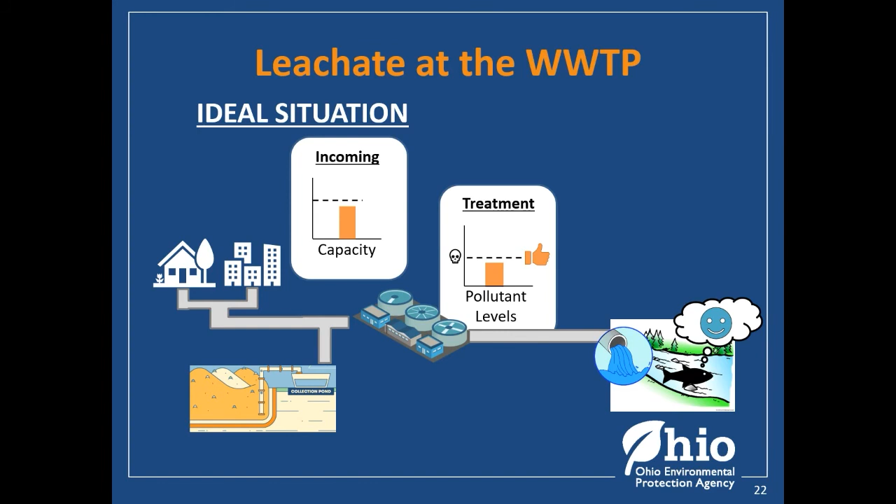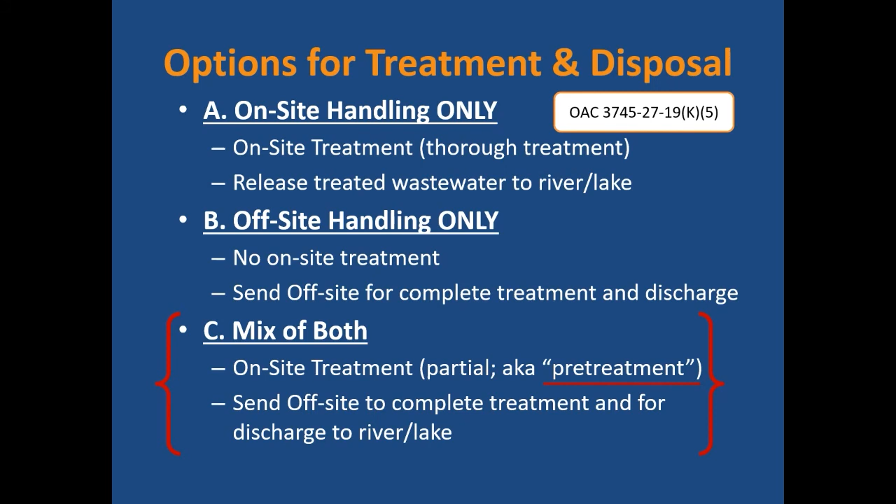To summarize, leachate is a liquid that has come into contact with landfill wastes. Landfill leachate is most commonly sent to a wastewater treatment plant for treatment and discharged to surface waters. However, there are other options, such as treating and disposing the leachate through on-site systems.

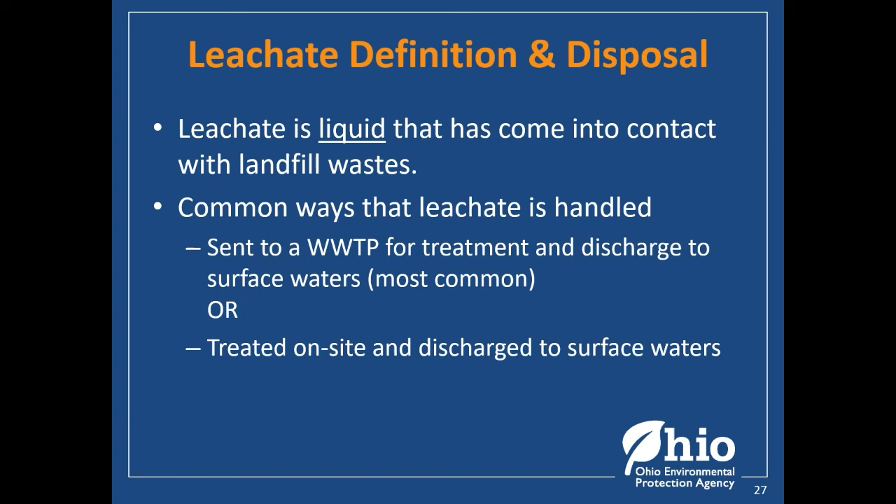Remember that DSW's focus is on protecting surface waters. We discussed in the previous slides how the leachate has potential to impact watersheds. Because these sources of pollution have potential to impact surface waters, Ohio EPA issues permits to these facilities to ensure compliance with surface water regulations.

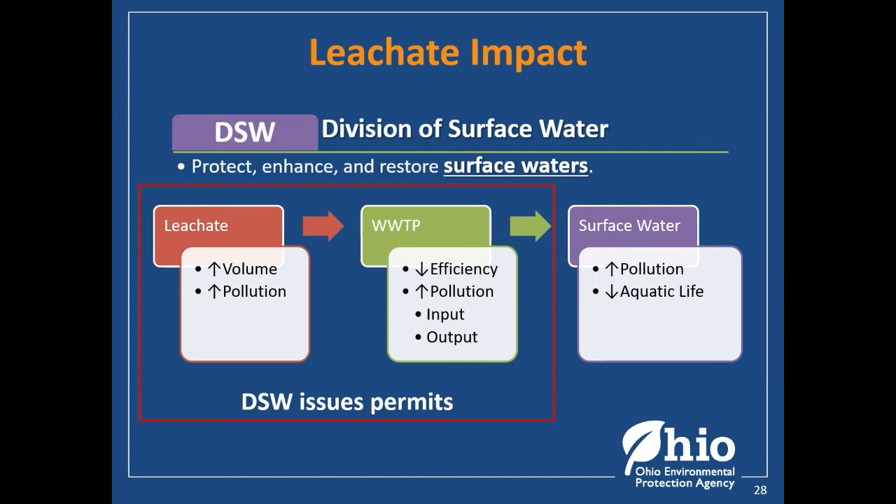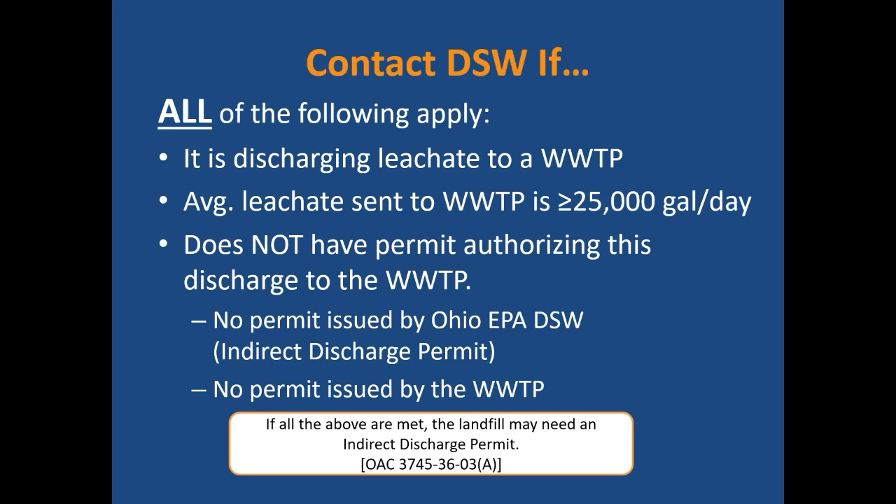In regards to permits, please contact me if all of the following apply: the landfill is sending its leachate to the wastewater treatment plant, more than 25,000 gallons of leachate is sent to the wastewater treatment plant each day, and the landfill does not have any permit authorizing it to send its leachate to this specific wastewater treatment plant. This means DSW did not issue an indirect discharge permit to it, and the wastewater treatment plant did not give them a permit either. If all of these criteria are true for the leachate disposal, then this landfill may need an indirect discharge permit to be able to continue sending its leachate to the wastewater treatment plant.

Now, if you wanted to find a list of indirect discharge permits, you can find it on Ohio EPA's website. Note that these permits are sorted by districts. Just for clarification, when I'm talking about this 25,000 gallon threshold, I'm talking about the amount of leachate that's typically discharged for a single day of hauling or discharging to the wastewater treatment plant.

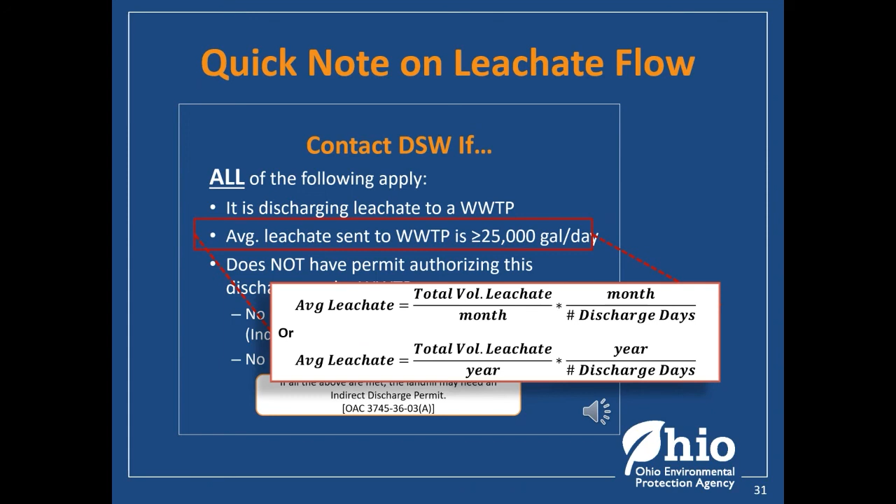For example, a landfill leachate facility reported disposing of 5 million gallons of leachate in 1 year. They also reported hauling wastewater 120 days over the past year, and that their leachate has always gone to the same wastewater treatment plant. If you divide 5 million gallons by 365 days, you get an average discharge of about 13,700 gallons a day. Because this is less than the 25,000 gallon threshold, we might assume no indirect discharge permit is needed.

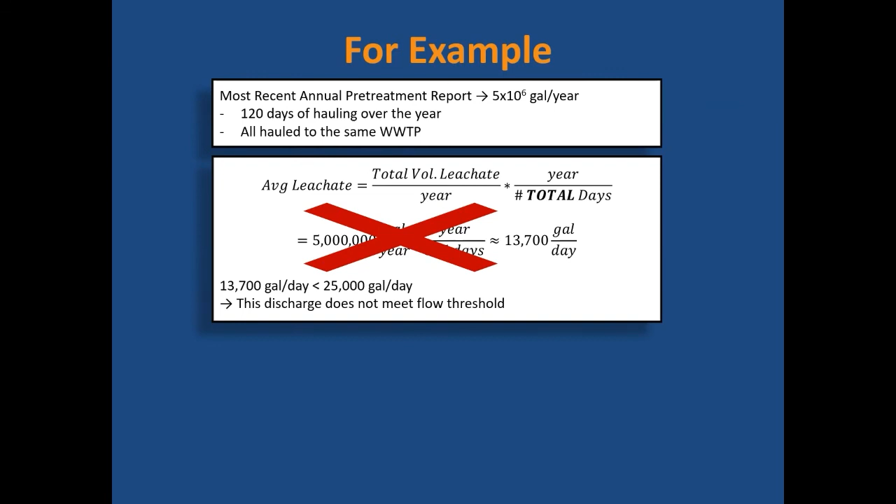However, this is the wrong solution because it factors in the total days in a year, 365, not the days in which the landfill actually hauled its wastewater to the plant, which is 120 days. If you recalculate the leachate flow using the number of discharge days, you get 42,000 gallons per day, a huge difference compared to the incorrect method above.

Because the discharge flow rate exceeds 25,000 gallons per day, this landfill may actually need an indirect discharge permit after all.

In addition to the list of indirect discharge permits, other resources on Ohio EPA's website include the annual operational report and daily log forms. Each municipal landfill submits this report every year around March, reflecting the previous calendar year. Contents include the volume of leachate generated, how it was treated and disposed of, as well as leachate sampling results. This report is available through Ohio EPA's eDocs website.

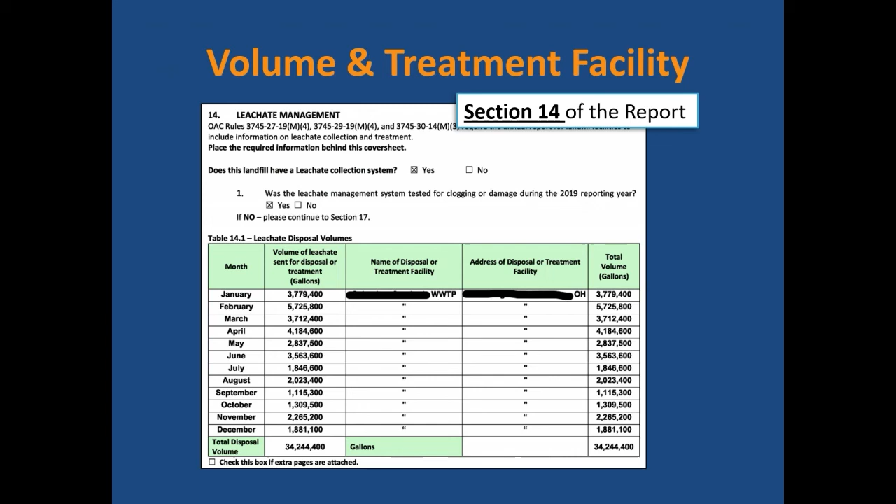You will find the volume and disposal methods summarized in section 14 of the operational report. It should have a similar layout to this example, where the volume and destination of leachate is broken down by months.

Leachate sampling results are located in section 15 of the report. This includes nearly 100 parameters, which include metals, inorganics, organics, and PCBs. These leachate sampling results are collected as a grab sample from the landfill management system.

Let's also talk about daily log forms. Landfills are required by law to maintain a daily log of operations. You can find a copy of this form on Ohio EPA's website. From my understanding, landfills do not necessarily have to use this exact form, but whatever records they use must include all the information required by law.